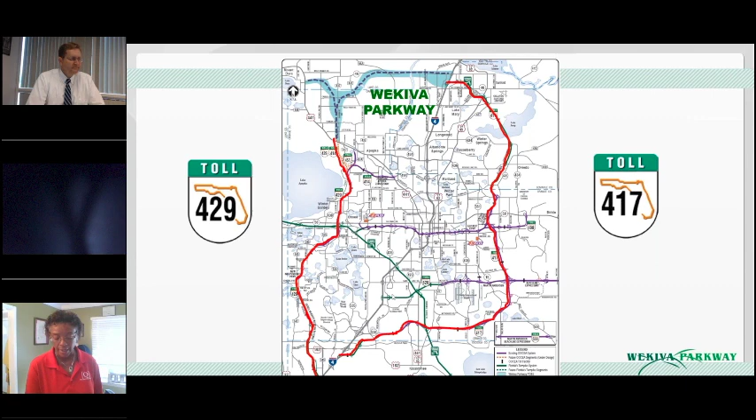So we just want to give you a quick big picture view of how the 25-mile Wekiva Parkway is filling the Beltway's missing link. This long-awaited project has been providing travel alternatives already and ultimately will enhance safety and relieve traffic congestion on roads like US 441 and State Road 46. In fact, we're already seeing this on some local roads.

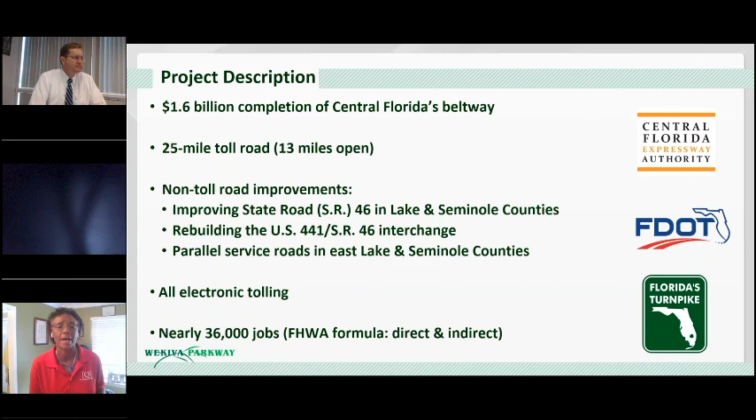So here's the cliff notes on the project. The $1.6 billion parkway is being developed jointly by the Florida Department of Transportation, the Central Florida Expressway Authority, and the Florida Turnpike Enterprise. One of the big things here is that there are non-tolled service road improvements as part of the project, so folks will still be able to get from Sanford to Mount Dora along the service roads without having to pay a toll if they choose. It features all electronic tolling, so you want to be sure to have your ePass and SunPass, and there are significant economic development impacts from this project.

Everyone's familiar with the natural gem that we have in the Wekiva River Basin. It's very important that the agencies have been following the 2004 Wekiva Parkway and Protection Act, and there were significant, previously unprecedented moves as part of this legislation. We have purchased 3,400 acres of conservation land, there are about a mile and a half of wildlife bridges, and they also have limited interchanges.

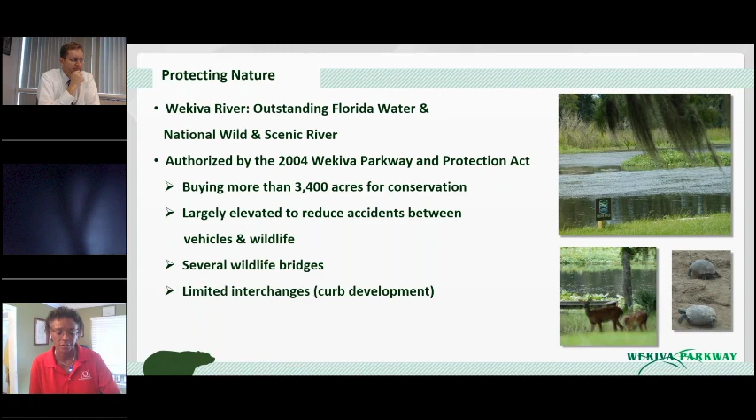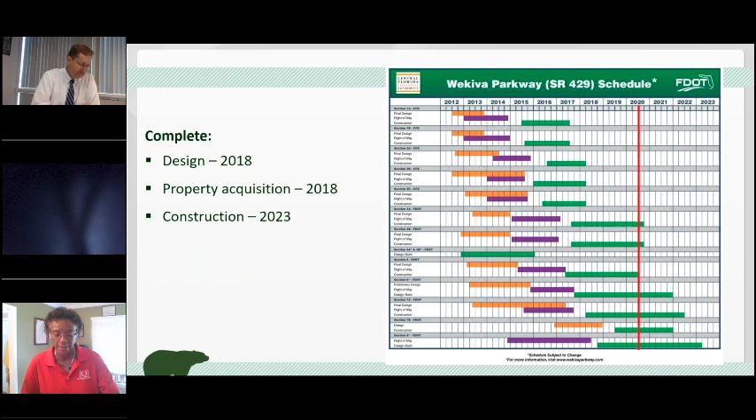Here you can see the overall schedule for the Wekiva Parkway. The left column shows you the various parkway sections. Orange bars represent the design, purple represents property acquisition, and both of those stages are complete. Of course, we are well into construction, with the overall project slated at this point to finish in 2023.

A little bit of information about some of the sections adjoining yours that you probably travel through also. Here we've got section 6, which is the longest section, about 6 miles long, started in 2017, looking to finish sometime in 2021. This is a section that if you're leaving the Redtail community, you're driving on portions of the new service roads that parallel the new parkway in this area. You're driving over some of the wildlife bridges, which you see indicated by these yellow icons.

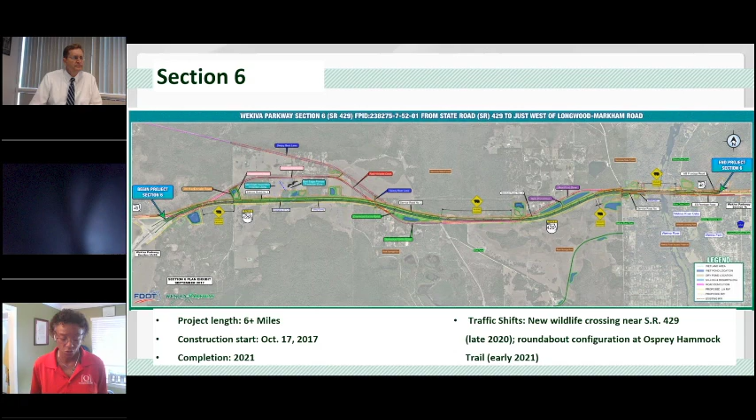Coming up on this project, we will be shifting traffic onto the final wildlife crossing west of State Road 429 by the end of this year, 2020. This will take traffic off the temporary metal bridge, which we refer to as the Acrow Bridge. Also on the eastern end, we will start to shift traffic into a roundabout on State Road 46 in the area of Osprey Hammock Trail in early 2021. So some big moves coming as we continue to progress through the project.

Section 7A basically goes from near Longwood Markham Road along 46 to just about Orange Boulevard. This, as you can kind of tell from the map, will include roundabouts as well as a number of bridges, as well as non-tolled service roads.

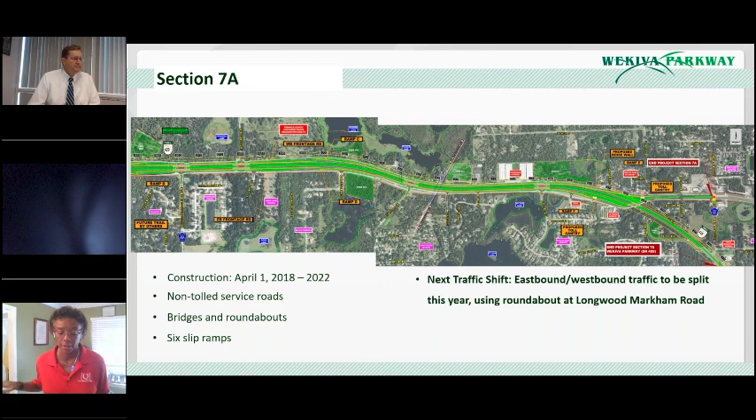So traffic, again, on this section will be splitting between eastbound and westbound, so we can really focus on building that parkway in the center and tying into Section 6. And this will be happening later in the coming months as well.

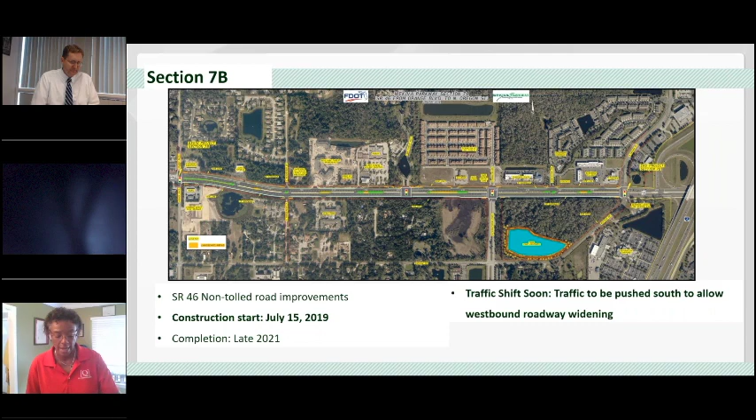Section 7B is the last non-tolled road improvement to State Road 46. It goes from about Orange Boulevard to just shy of I-4 at Oregon Street and Wayside Drive. This started last year and is scheduled to finish in 2021. In the next couple of months, you'll see traffic shift to the south side of State Road 46 in this area, and that'll allow us to widen the westbound travel lanes.

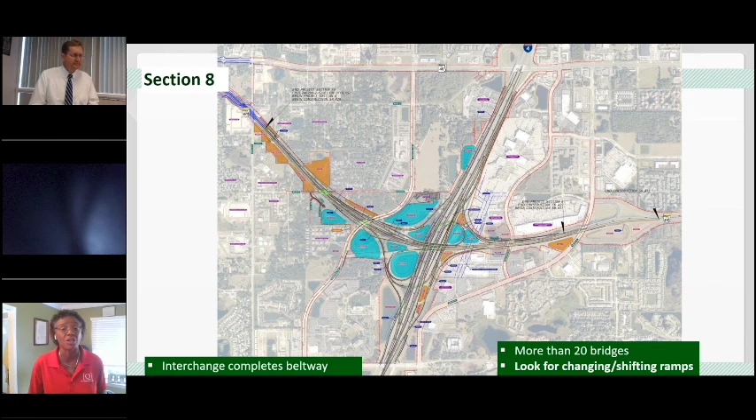So the department has a long history of communicating with the county and the community on this Section 5. We've had numerous briefings with your county commissioners and a full HOA over the years. There were more than 10 public meetings and hearings during the PD&E study. We've also had a number of meetings since design, and the roadway plans are the same since that last public meeting was held in May of 2017.

So while it's anticipated that County Road 46A at some point will be a 4-lane road, the department has elected to build the lanes farthest away, which will be the ultimate northbound lanes, from the community first. That was intentionally done to lessen the impact to the community. We've got the right of way to widen the road to 4 lanes when that is necessary based on future traffic demands, but the projections don't show that will be needed for many years.

Also, to lessen the impacts to the community, where County Road 46A comes closest to the homes on Estates Ridge Drive, FDOT depressed or lowered a section of the road below ground level. The department also left a minimum 50-foot, and in many cases closer to 100-foot, wide treed or forested buffer between the homes and the new road.

So now I'll turn it over to my colleague, Nick Lully, to discuss some of your concerns and what's coming up next in your area. Nick? Thanks a lot, Mary.

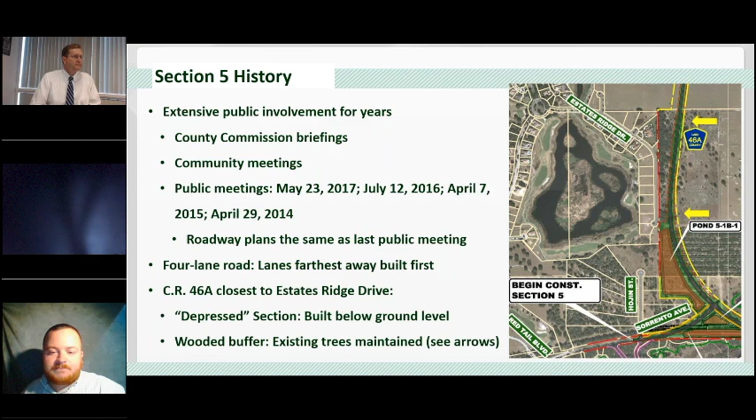So here is a look at the profile plan sheet for the landscaping enhanced plans that we developed, and I'm going to toss it over to John Tyler to talk a little bit more about this.

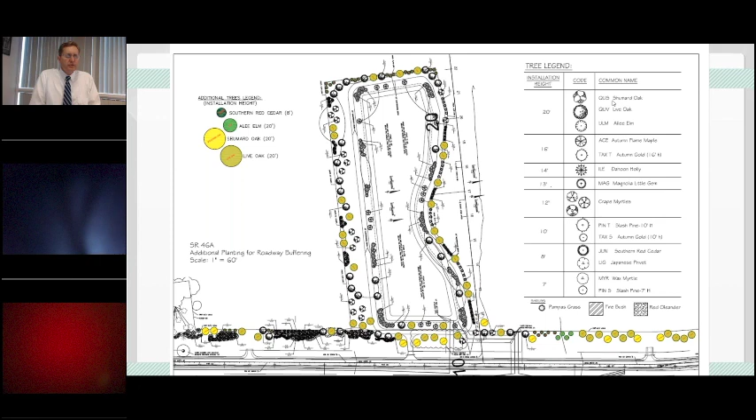All right, thank you, Nick. So as Nick and Mary have mentioned, the department is committed to lessening the impact to the Red Tail community by the realignment of 46A. Several strategies have been employed to do that. We've lowered the profile where we were able, and we've maintained existing trees where we were able. One area that we need to do some more work is around the pond.

That's the low area of the project. We weren't able to lower the road in that area, but we do have a plan for a very robust landscaping plan that's going to be going in as we move into the fall.

We had a unique opportunity as the main roadway work finished up. We were able to go out with our landscape plans and actually stand on the new ground and look at the lay of the land and make sure that we were covering all of the points where the roadway and the homes could potentially be visible. And we identified gaps in the landscaping that we were intending to install.

Over the last month or so, we've been identifying those gaps, and we've been revising our landscape plans based on what we're seeing out in the field, so that we can ensure that we're doing as much as we can to lessen the impact on this community.

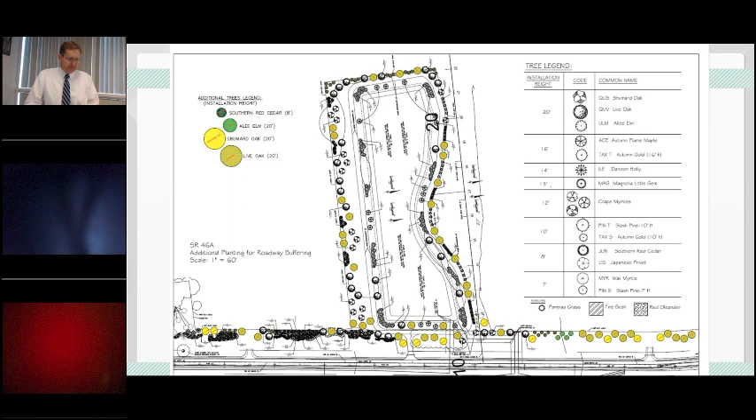So the plans that you're seeing tonight are actually still in development. We haven't shared these revised plans yet with Lake County or with the community, but we will once we believe that we have completed our revisions. We want to share that with both the community and the county and make sure that we have addressed everyone's concerns. And that should be happening over the next couple of weeks. Nick, I'll turn it back over to you.

Thank you, John. So as part of preparing for this meeting tonight, obviously just looking at a plan profile doesn't give you the full picture. So we actually developed some graphics here that depict what these trees will look like after they're installed, and then in approximately 10 years once they've matured a bit and added some height and fullness to them.

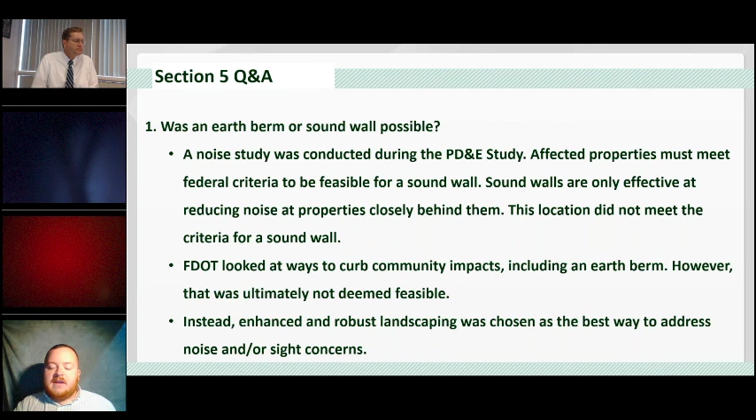One question was, is an earth berm or sound wall possible? A noise study was done during the PD&E study phase long before construction kicked off, and affected properties for that process must meet federal criteria to be feasible for a sound wall. Sound walls are only effective for reducing noise for properties closely behind them, and this location did not meet the criteria. We're always looking at ways to curb impacts to the community, and that includes earth berms, but ultimately that was not deemed feasible in this case. Instead, we chose enhanced and robust landscaping as the best way to address some of the noise and sight concerns shared by residents during those public meetings.

The question was, were statutes for land use planning and control followed? In this case, local governments have jurisdiction over land use planning. FDOT followed state statute in relocating County Road 46A, as required by the 2004 Wekiva Parkway and Protection Act that governed this project. All applicable permits were obtained, and the FDOT public involvement guidelines were followed leading up to this construction process. That included extensive coordination with Lake County on the ultimately recommended alignment during the PD&E study, in addition to the community and public meetings we've been mentioning throughout this presentation.

Another question was, what is the projected noise level for the realigned portion of County Road 46A? Again, a noise study was performed prior to construction kicking off during those initial phases, and there were some numbers on that chart for Red Tail identified as the noise increases based on the amount of linear feet away from the roadway. Some of those homes across the golf course are more than 1,000 feet away from the roadway. Halfway through, at about the golf course itself, there was only a 5.6 decibel increase in noise. We included a chart on the right with comparable noise levels: 20 decibels would be the rustling of leaves on a tree, all the way up to 115 decibels, which is what you'd hear from a jet flying 500 feet overhead.

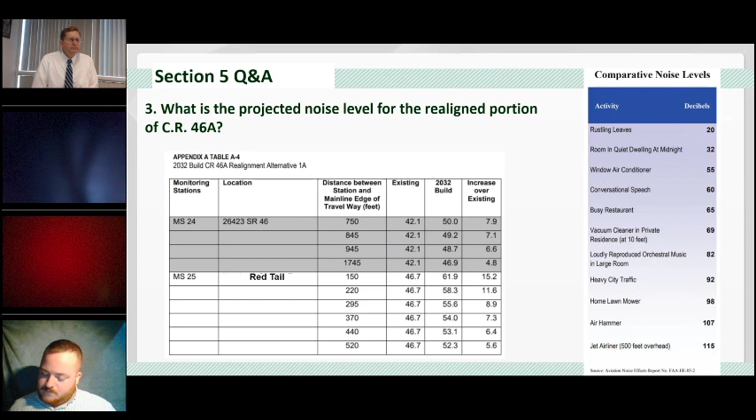Another question was about the projected traffic volume. The ultimate 2032 projected volume of traffic was 19,880 to about 22,500 vehicle trips per day on average. When that traffic study was done, the 2019 volume was expected to be 12,830 to 14,510 vehicle trips per day on average. Ultimately, last year, the latest numbers showed we averaged about 8,000 trips per day on County Road 46A between State Road 44 and State Road 46. The estimate given for the amount of truck traffic included in those counts was 11.58%.

We received a question about the Federal Highway Administration and their involvement in this project, and the answer was yes, they were involved. They've been involved since the PD&E study phase, and in 2012 FHWA issued a finding of no significant impact letter for the Wekiva Parkway projects. FHWA continues to be involved in the project, including site visits and other coordination.

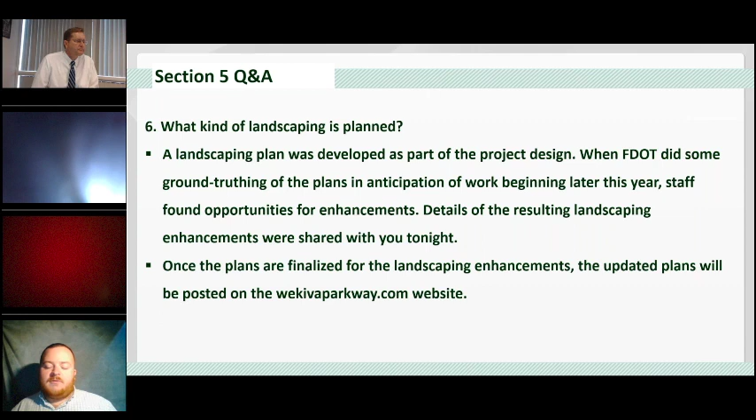Now, I know that's a lot of questions or information to go over. I also want to briefly bring up another list of questions that we received around, I believe, late yesterday. I'm going to attempt to bring that up on a different window here.

Okay, so you should see the list of questions that were received yesterday. We kind of touched on a lot of these already. I'm just going through the list here. We asked for the questions. So I know there were some questions about the landscaping that was planned closest to the front entrance.

So I was wondering if maybe Joan could jump on here and talk about these specific species that were going to be planted closest to the red tail entrance.

Yes, this is Joan. Early in the process, we did have some communication with the homeowners, which had commented on our original landscape plan in front of their subdivision. The response we had is they preferred to go back to magnolias and ligustrum trees, and so our plans were revised to reflect that.